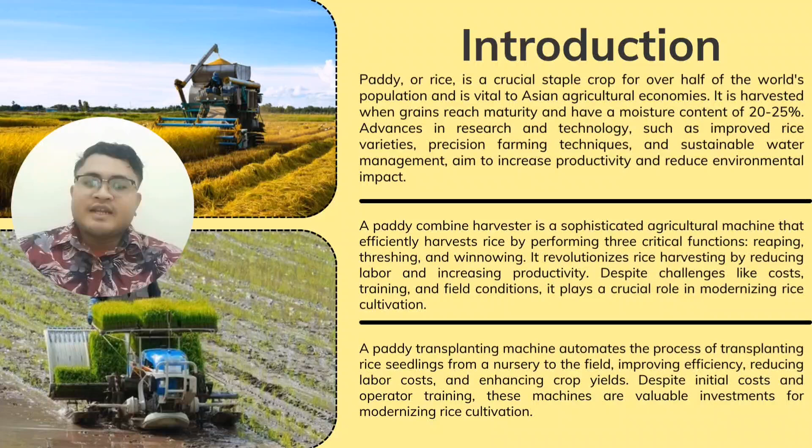Then is a paddy transplanter. A paddy transplanting machine automates the process of transplanting rice seedlings from a nursery to the field, improving efficiency, reducing labor costs, and enhancing the crop yield. Despite initial costs and operator training, these machines are a valuable investment for modernizing rice cultivation.

Next I will continue with the operation of both rice transplanters. It's divided into 4 sectors: engine operation, movement, control mechanism and operational efficiency. Firstly, for the engine operation, an air-cooled 4-stroke single cylinder OHV gasoline engine powers the rice transplanters KNP4W and KNP6W. The recoil starter is used to start the engine, guaranteeing a dependable start every time. It is also essential to do routine engine maintenance, which includes monitoring the fuel level and making sure unleaded automotive gasoline is used. The 10-liter gasoline tank on both models offers enough capacity to lessen the need for frequent refilling stops, improving operational efficiency.

For the movement, rubber wheels with broad rims that can be raised or lowered by a hydraulic mechanism allow both transplanters to move easily. This modification is necessary to navigate various field conditions, particularly in muddy areas. The primary shift on both models allows flexible mobility during the planting operation with 2 forward gears and 1 reverse gear.

For the control mechanism, a horizontal control mechanism is a feature shared by the KNP4W and KNP6W that keeps the transplanting portion horizontal and improves planting accuracy. Furthermore, the machine height may be automatically adjusted by the transplanter to accommodate different field circumstances and maintain constant performance, so the planting process remains accurate and efficient. Several control methods are also essential.

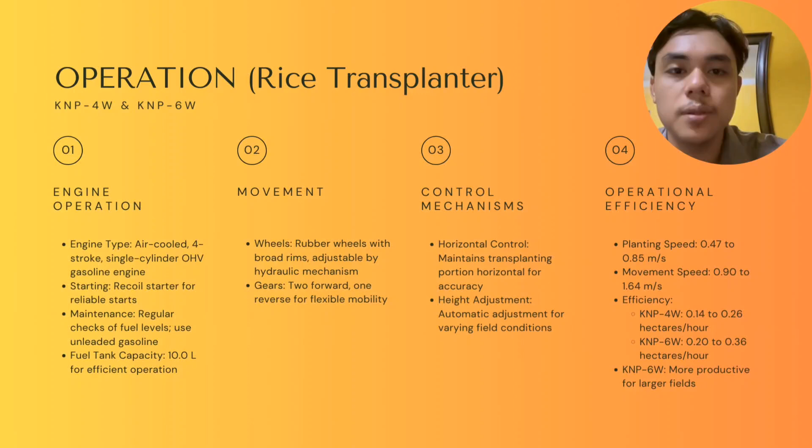For the operational efficiency, these models' planting and moving speeds demonstrate how well they operate. There is a range between 0.47 to 0.85 meter per second for planting and 0.9 to 1.64 meter per second for going on the highways. The operating efficiency for KNP4W and KNP6W is different: KNP4W is 0.14 to 0.26 hectare per hour, while 6W is 0.2 to 0.36 hectare per hour. This shows that KNP6W is more productive overall since it can cover a wider area faster and is better suited for larger fields. I will continue with the operation of the combine harvester.

The first combine harvester is the Kubota DC68GHK2, while the second is the Kubota DC99GHK. Firstly, the harvesting operation. Both combine harvesters cut the crops using the reaper sections. The first combine harvester has a cutting width of 2000 mm, while the second is 2182 mm. For the threshing operation, the combine harvester separates grain from the straw. For the first combine harvester, the threshing cylinder diameter is 580 mm, concave, while the second has a diameter of 620 mm, concave.

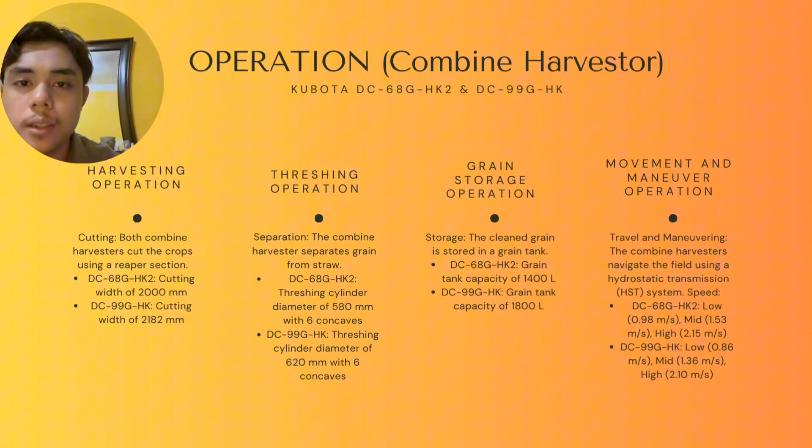For the grain storage operation, the clean grain is stored in the grain tank. The first combine harvester can store 1,400 liters, while the second can store 1,800 liters. For movement and maneuvering, the combine harvester navigates the field using a hydrostatic transmission, the HST system. For the first combine harvester, low speed is 0.98, mid 1.53, and high is 2.15 meter per second. For the second combine harvester, low is 0.86 meter per second, mid is 1.36 meter per second, and high is 2.10 meter per second.

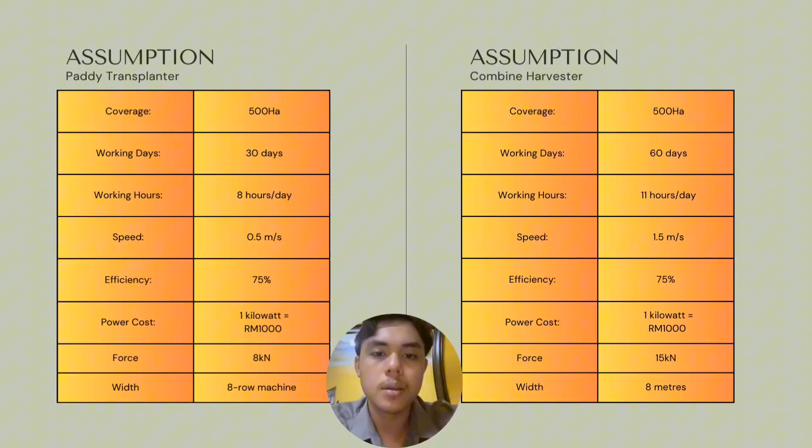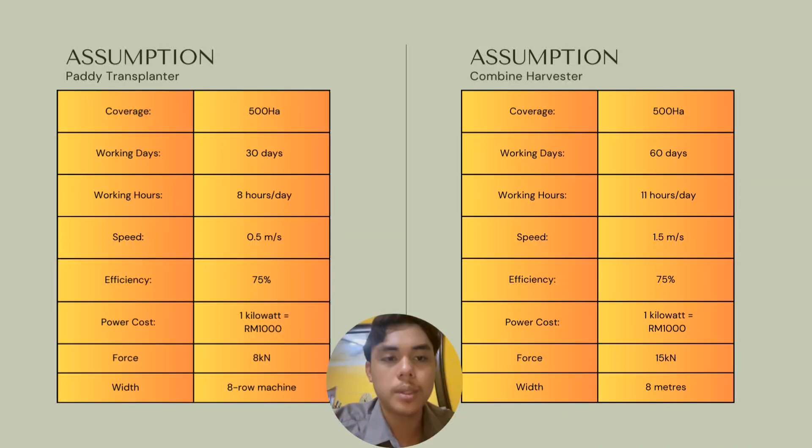So I will continue for the assumption. Firstly is for the padi transplanter. Coverage is 500 hectare. Working days is around 30 days. Working hours is 8 hours per day. Working speed is 0.5 meter per second. For the efficiency is 75%. Power cost is 1 kilowatt is equal to 1,000 ringgit. Force is 8 kilonewton. Width is 8 row per machine.

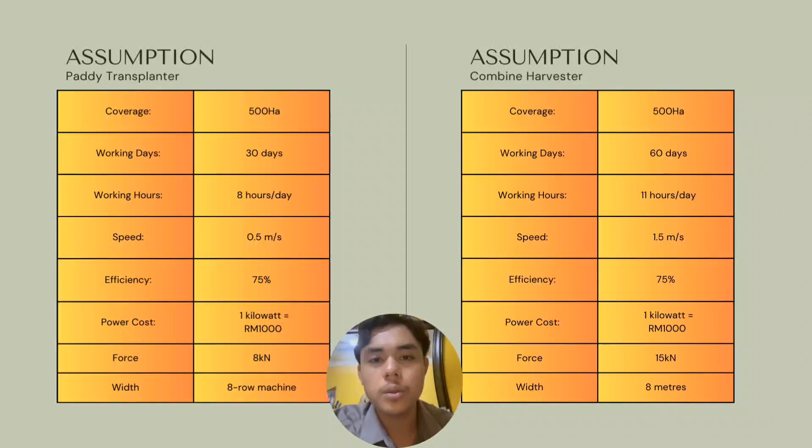So for the assumption, for the combine harvester, coverage is also 500 hectare. Working days is 60 days. Working hours is 11 hours per day. Speed is 1.5 meter per second. Efficiency is equal 75%. For the power cost, 1 kilowatt is equal to 1,000 ringgit. For the force is 15 kilonewton, while the width is 8 meters.

For transplanting operation, it is assumed that 30 days at 8 hours per day with a field efficiency of 75% to cover an area of 500 hectare. The first model would be the KNP4W, given the specification of the dimension of 2.14 meter with the width of 1.63 meter. Number of planting rows is 4, using gasoline fuel with a planting row spacing of 30 cm. Planting speed is 0.5 meter per second. Operating efficiency is 0.26 hectare per hour with the engine power of 3.3 kilowatt or 4.4 horsepower.

The TFC, theoretical field capacity, will be calculated by using a formula of speed times width divided by 10, which yields 3.06 km per hour times 1.63 meter over 10, yielding the value of 0.4988 hectare per hour. The effective field capacity, by the formula of TFC times FE, yields 0.4988 hectare per hour times 75%, giving the value of 0.3741 hectare per hour. The working width is calculated by using a formula of EFC times 10 over speed times 100 over field efficiency, yielding the value of 1.63 meter.

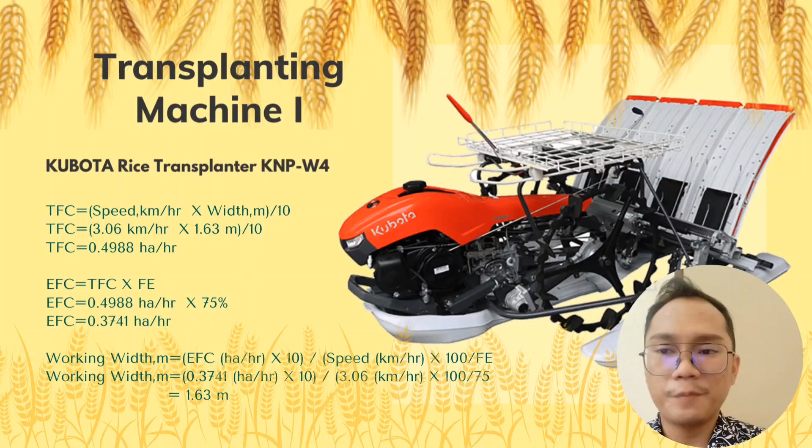The second transplanting machine would be the Kubota KNP6W with the dimension of 2.393 meter in length and width of 2.28 meter, with the number of planting rows of 6, same fuel as KNP4W, which is gasoline, planting row spacing of 30 cm with planting speed of 0.85 meter per second, with the operating efficiency of 0.36 hectare per hour, with the engine power of 4.1 kilowatt or 5.5 horsepower.

Thus, the theoretical field capacity using the KNP6W uses the same formula as KNP4W, which is speed times width over 10. The 3.06 km per hour is computed from the 0.85 meter per second, times 2.28 meter over 10, which yields the value of 0.69768 hectare per hour. The effective field capacity will be computed by using a formula of TFC times FE, which yields the value of 0.52326 hectare per hour. The working width using this machine is 2.28 meter, by using the same formula as KNP4W.

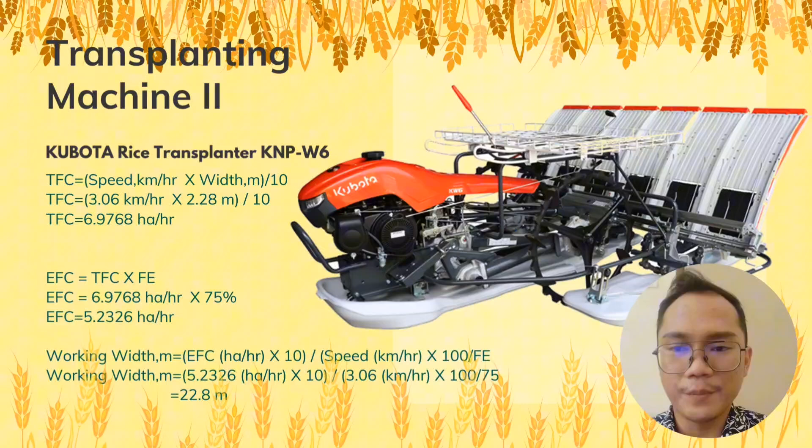Therefore, the rice transplanter model KNP6W will be chosen for the transplanting operation due to its field capacity of 5.2326 hectare per hour being more than 2.0833 hectare per hour. The working width of 22.8 meter is higher than 15.43 meter, and the required power of this machine is more than the assumption value, which is 4.1 kilowatt is more than 4 kilowatt.

Based on the assumption value, the required field capacity will be calculated by using a formula of covered area in hectare over hours in field, yielding a value of 2.0833 hectare per hour, which is suitable using one machine. The required working width uses the same formula, EFC times 10 over speed times 100 over field efficiency, yielding the value of 15.43 meter. The required power based on assumption value is force in kilonewton times speed in kilometer per hour divided by 3.6, yielding a value of 4 kilowatt.

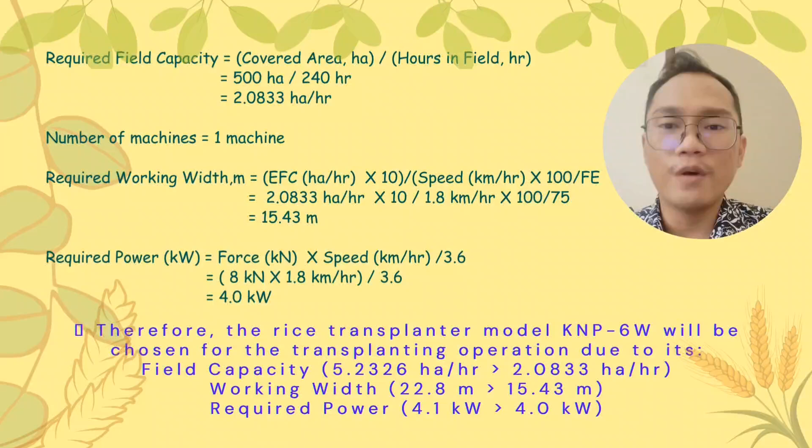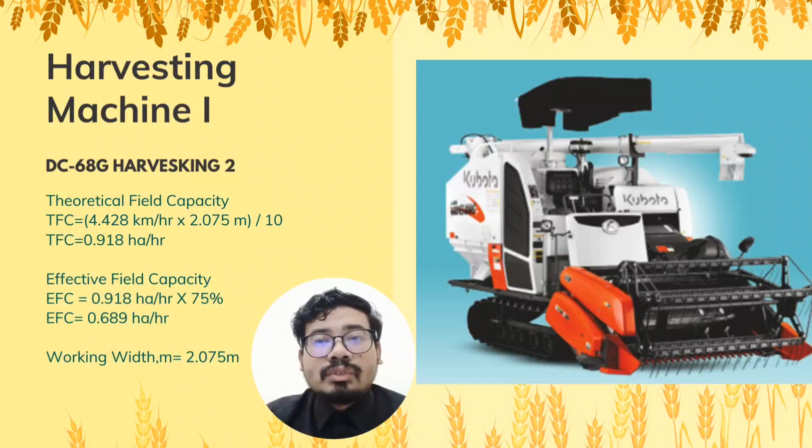Assalamualaikum, my name is Muhammad Izzat bin Abdul Aziz, and now I will explain the machine capacity of the harvesting machine. The first machine is the DC68G harvester, for which we compute the TFC, the theoretical field capacity, by multiplying the speed, which is 4.428 kilometer per hour, by the width, which is 2.075, divided by 10, giving a total TFC of 0.918 hectare per hour. After that, we determine the effective field capacity, the EFC, by multiplying the TFC with the field efficiency of 75%, giving a total EFC of 0.689 hectare per hour. We also determined that the working width for the machine is 2.075 meter.

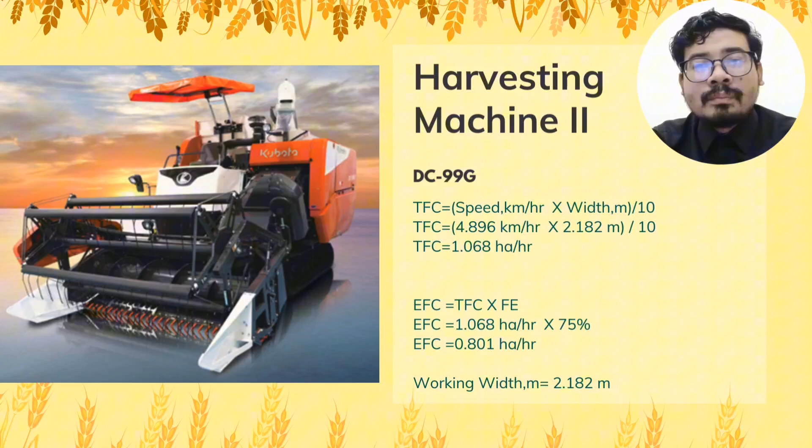Okay, next for the second machine, which is the DC99G, we also do the same thing. We calculate the TFC and also EFC. For the TFC, we get a value of 1.068 hectare per hour, and we multiply the TFC with the field efficiency, which is still 75%. We get a total value of 0.801 hectare per hour, and the working width for the machine is 2.182 meter.

And after that, we've determined the required field capacity, the required working width, and also the required power for the field operations. So for the field capacity, we divide the area over the time, which gives a value of 0.758 hectare per hour. For the working width, we multiply the EFC by 10, divide it by the speed, and also multiply it by 100 over the field efficiency. And then we get a total value of

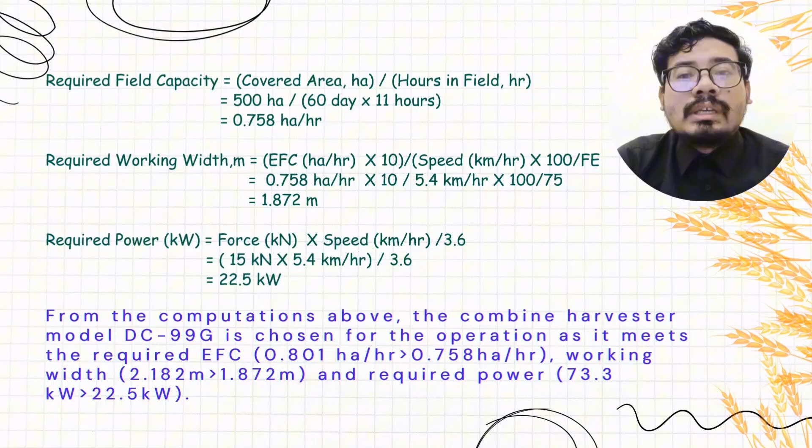1.872 meter. And for the required power, we simply multiply the force by the speed divided by 3.6, which gives a total of 22.5 kilowatts for power. And from the computations above, we've determined that the combine harvester model DC99G is chosen for the operation, as it meets the required field capacity, working width, and also power.

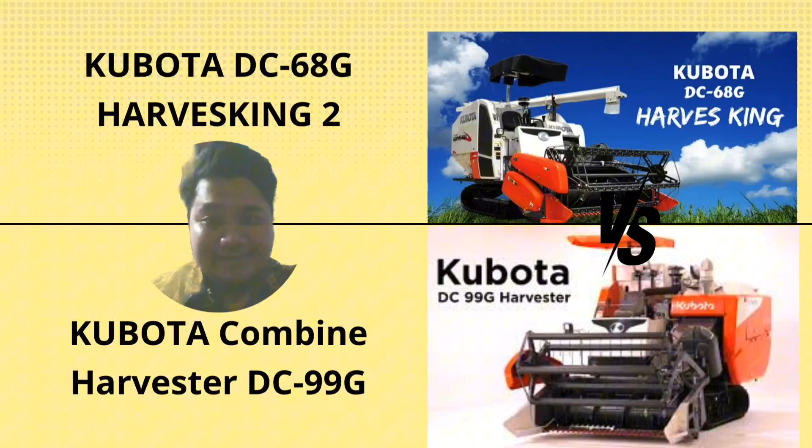So now we go to the cost analysis, which is for the Kubota DC68G harvester and the Kubota combine harvester DC99G. So for the fixed cost for the Kubota DC68G, for the depreciation we get 12,540 per year. Meanwhile the TSII, which is tax, shelter, insurance and interest, we get RM7,920 per year. And for the repair cost, we get 7,332.86 per year. And the total fixed cost for Kubota DC68G, we get RM27,

792.86. Meanwhile, for the Kubota DC99G, for the depreciation, we get RM18,677 per year. And the TSII we get 11,796 per year. And for the repair cost we get 10,921.52 per year. And the total fixed cost is 41,394.52.

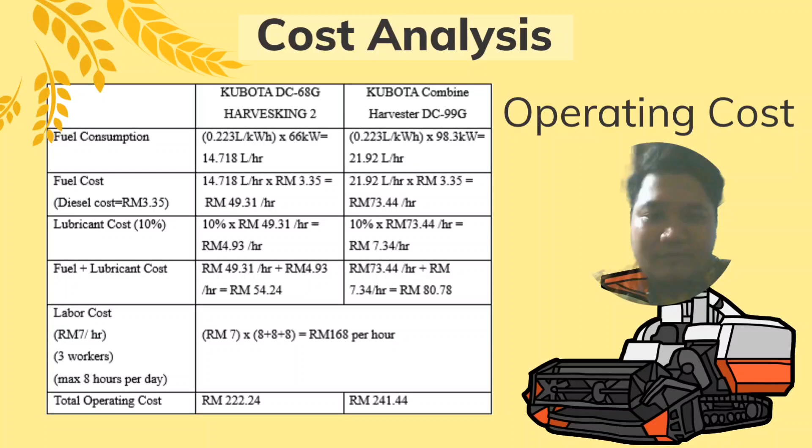Meanwhile, for the total operating cost, we need to find the operating cost, which is the lubricant cost, fuel cost and labor cost. So the total operating cost for Kubota DC68G is RM222.24. And for the Kubota combine harvester DC99G it is RM241.44.

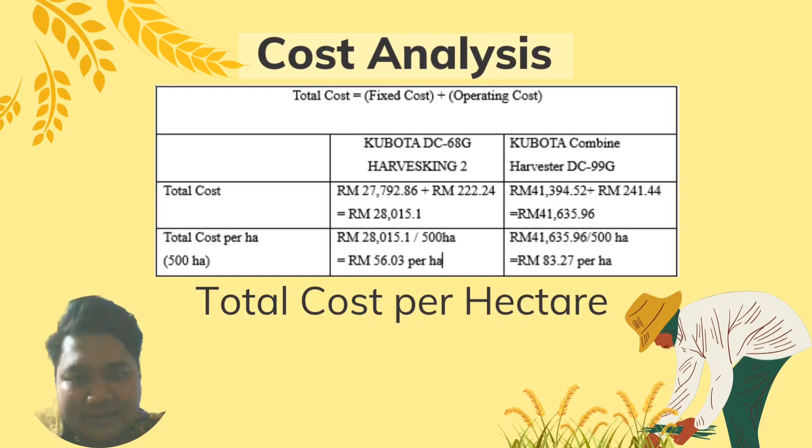So now we go to the cost analysis for total cost per hectare for the Kubota DC68G. The total cost is fixed cost plus operating cost. So the total cost for Kubota DC68G is RM28,015, and for DC99G RM41,635. And for the total cost per hectare we divide it by 500 and we get 56.03. And for the harvester DC99G we get 83.27.

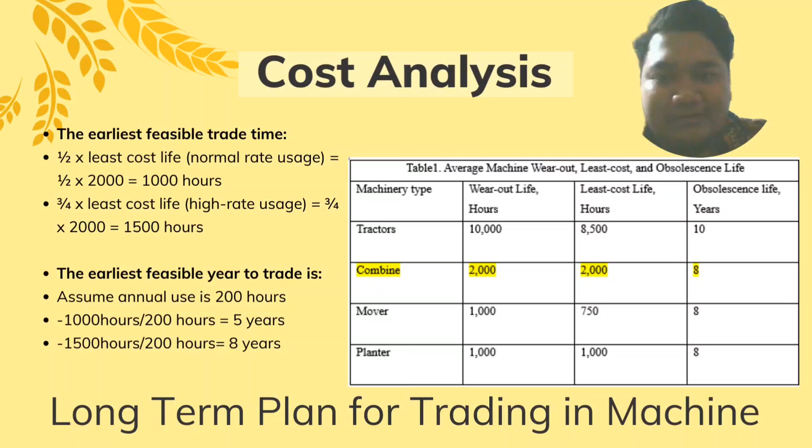So for the long-term plan for trading in the machine, for the earliest feasible trade time, we multiply with 2000, which is from the table, and we get 1000 hours for normal usage, and for higher usage 1500 hours. We assume annual use is 200 hours, so we divide 1000 hours by 200 hours, and we get 5 years. And the maximum, the high rate usage, is 8 years, which is 1500 divided by 200 hours.

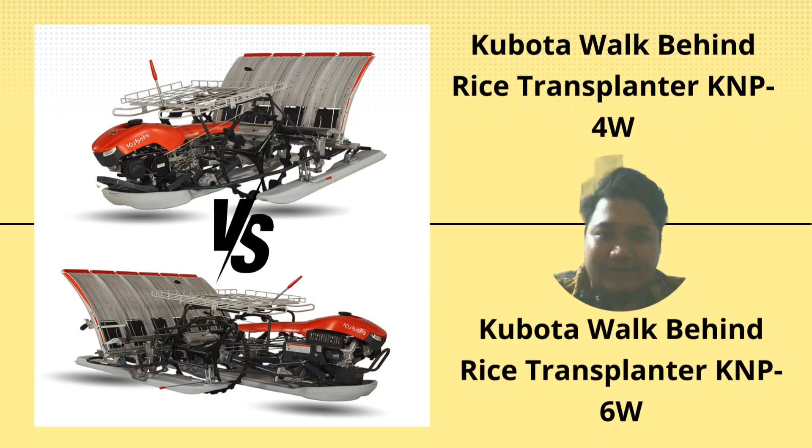So this is the operating cost for the KNP 4W and 6W. So we need to find the fuel and lubricant cost and the labor cost. So the total operating cost for KNP 4W is RM108.42, and for the KNP 6W we get RM109.36.

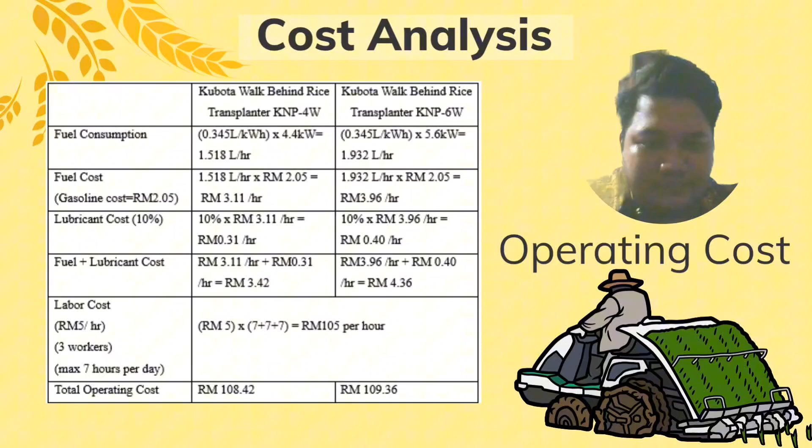Now the long-term plan for trading in the machine. From the table, we go to the planter, as it's a rice transplanter, with 1000 least cost life and wear out life. So we need to find the normal rate usage for early feasible trade and the high rate. So we get 500 hours and 750 hours. For the earliest feasible year to trade, we assume that the annual use is 100 hours. So 500 divided by 100, we get 5 years, and 750 hours divided by 100 hours, the maximum usage is 8 years.

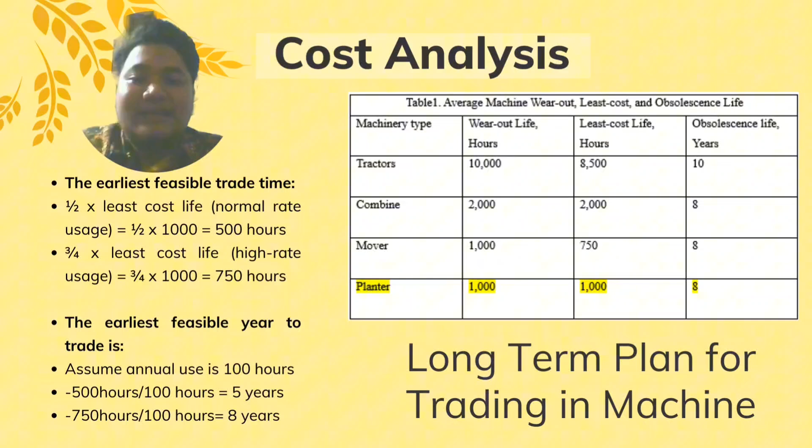Then, when we talk about costing, the KNP 6W is a cost-effective machine for larger operations and budget-conscious farmers, offering higher operational efficiency and productivity. It can cover a 500 hectare field area and enhance productivity and time. Then for the combine harvester, the DC99G, while higher in cost than the DC68G, can also improve paddy yield quality, operate within a 500 hectare capacity within the time period, and ensure a longer operation life.